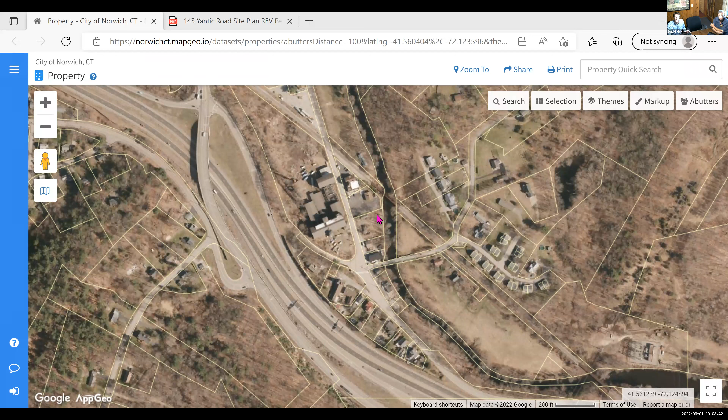I'll start by sharing the GIS aerial photo of the area. This is Route 2 here under the cursor, and here is Hale Mill. Right here is Yantic Fire Engine Company. This is the existing parking lot and existing garage, and this is the currently vacant lot where our proposed expanded paved parking and training area will be constructed. You can see that the Yantic River forms the property line on the east side of each of these lots.

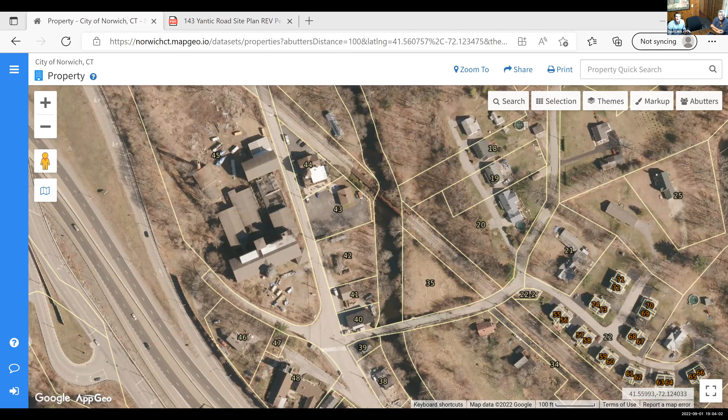Now David, I'm not getting those. If I could just stop you, they're not showing up on the screen. Still not. GIS? Okay, uh-oh. There you go, okay. So did you miss all the photos? Yeah, oh geez, I'm sorry about that.

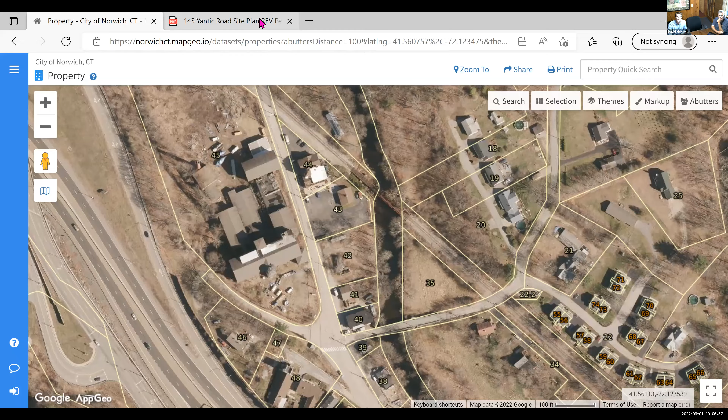All right, so that's our photos. Again, I apologize for that issue there. I'll go back and now you should be seeing our existing condition survey.

Right, so now we'll go to the proposed site plan. There are two parts to this project. One is the construction of a new paved area where the existing gravel surface is, outlined here, taking up most of the property.

This approximately 3,300 square foot area is going to be pervious pavement, which allows stormwater runoff to freely flow through the surface. Below that is a thick layer of different gradations of crushed stone that hold onto that water and allow it to infiltrate. We're using this to reduce runoff from the site and capture the first inch of runoff from all existing and proposed impervious areas that used to flow out to the paved leak off here, which is being eliminated.

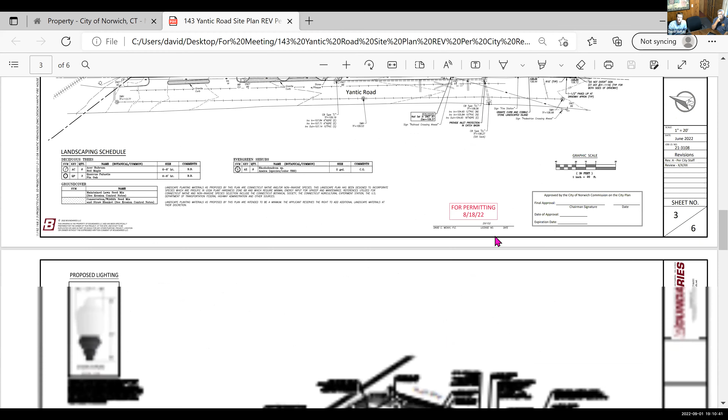This is just the utilities and drainage plan. You can see there is an existing town or city drainage discharge that runs through the property out to the river.

We are proposing to have a high level connection to that drainage pipe, just to protect the surface of the pavement during winter months so it doesn't get subjected to a freeze-thaw cycle from that pervious paved area.

Install a manhole in the parking area where there's been a drainage repair recently, and then connect those under drain pipes to that. Those under drains would only collect the high level of runoff exceeding the 1-inch water quality volume, so it would all be treated water entering this manhole from the parking area, proposed, existing, and the garage here.

Also some proposed lighting along both sides here, and proposed utility service connections for the new garage.

This is the erosion sediment control notes and other standard details. Right here is our proposed E&S measure, a straw wattle. The reason we're proposing this is it's light and easy to install.

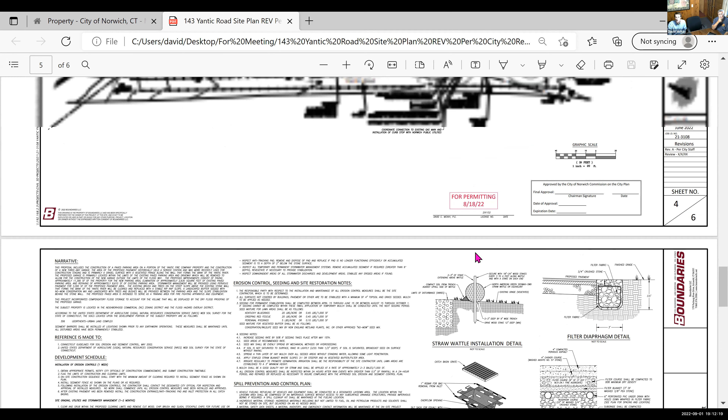Let me go back to the correct sheet. That'll be able to be placed along the entire perimeter of our proposed disturbance before any clearing needs to happen, or grubbing or anything along those lines. It comes in rolls and will be staked in right behind that stone retaining wall, and then up along our limit of disturbance for the regrading and elimination of the pavement behind the proposed buildings.

One other item to note about this property is the entire property is located in a FEMA designated floodplain, and this line here is the limit of the FEMA designated floodway. So as part of this project, the proposed garage will be dry flood proofed.

We are grading the new parking area and behind the building here to provide compensatory storage for the volume displaced by the new building. So all of this area will be lowered from the existing grades to make up that compensatory storage.

And then you can see here, the limit of the floodway. The work shown in the floodway is the slope stabilization, the landscape plantings, and a short strip of the pervious pavement along the edge here, and that stone filter strip.

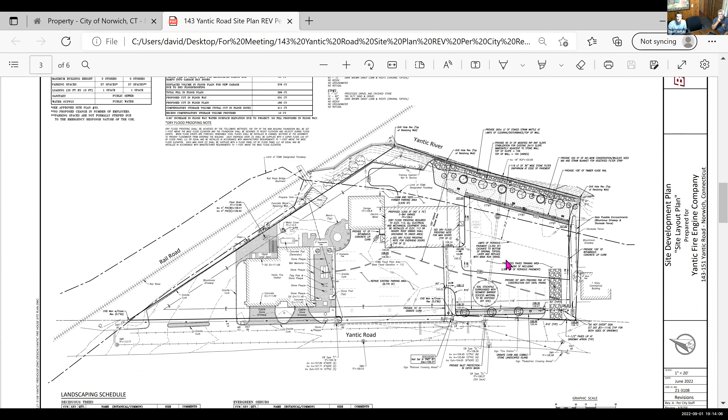Detail for the straw wattle that I discussed, that'll be installed at the perimeter of the project area. Catch basin inlet protection for the catch basin right in front of the property, and a detail for that filter diaphragm along the edge of the pavement.

That's a stone filter for any excessive runoff that ends up flowing over the pervious pavement in extreme storm events. And then the detail for the pervious pavement cross section with the pervious pavement layers, pea stone and sand filters, and then the main storage area for that volume of runoff.

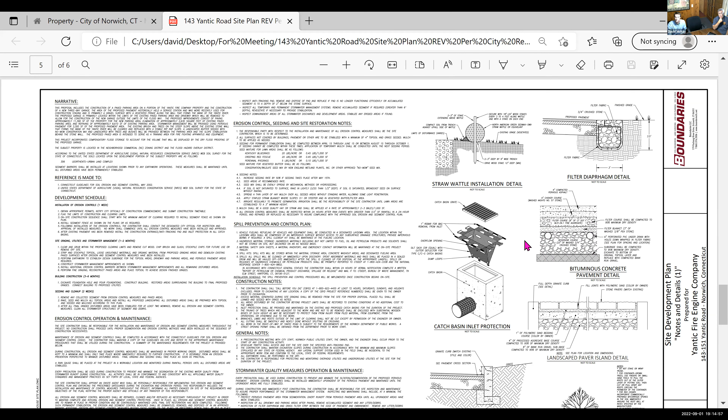There's also proposed to be a landscape paver island consistent with the existing granite and pavement islands that are on the property, and granite curbing, detail for our tree planting, and then the curb along the parking area and the parking cross section.

And an anti-tracking pad detail for the location that construction equipment would exit from the parking area during construction. And just final detail sheet for the riprap slope stabilization immediately behind the stone retaining wall.

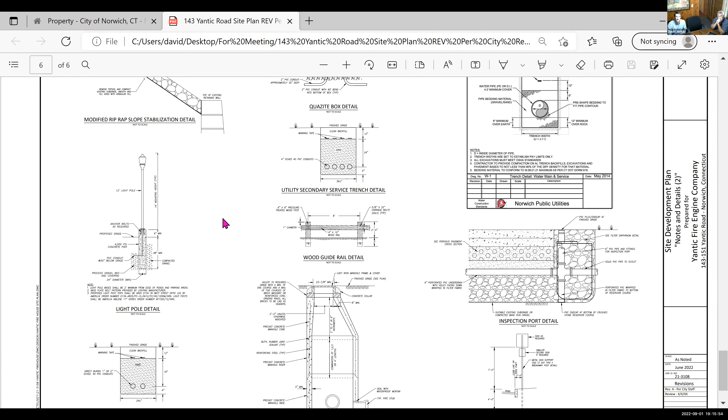Detail for the proposed lighting, which matches the lighting that was installed on the bridge just down the street as well, keeping in kind with the neighborhood.

Detail for the electrical conduits for the lighting, conduit for the service trench, and the handholes for the lighting. A detail for guide rail right along the edge of that proposed training and parking area, our drainage manhole.

The under drain system that I mentioned at the top of that stone storage course underneath the pervious pavement, and detail for the water service and some directional signage.

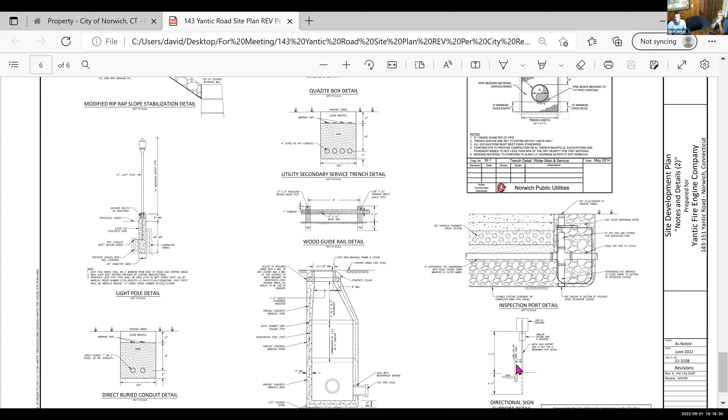Our total area of activity on this project, about a half acre of this is in the upland review area of the Yantic River. You can see the upland review area line here does encompass most of the property.

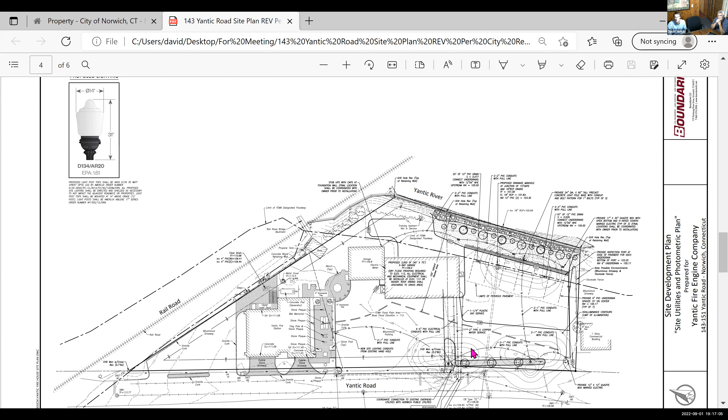I think that that brings me to the end of the plan set and the presentation. Happy to answer any questions.

Dave, you want to go over again what happens in a major storm when you have more than an inch of rain?

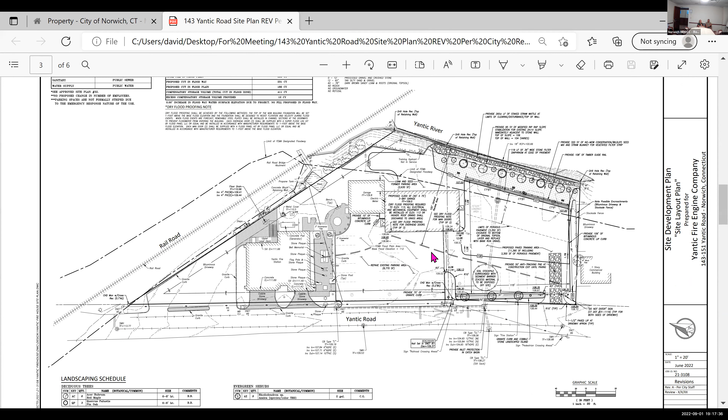Yeah, I'm scrolling down to the cross section here that shows the under drainage system. So this layer of crushed stone here below that piping is sized to hold more than that first inch of runoff. That's intended to provide the peak flow rate attenuation.

So we did prepare and submit a stormwater management report that was reviewed by Brian Long, the city engineer, demonstrating that with the infiltration of this stone course and the control provided by this 6-inch outlet pipe, peak flow rates will not exceed existing conditions peak flow rates as a result of the project.

These upper layers of pavement, stone and sand help filter the runoff as it comes into the pervious pavement cross section. Then that runoff would get down into this lower layer of stone here and begin infiltrating into the existing soils below it.

And in those extreme events, we would get to a condition where runoff would pond to a point where it can flow into this perforated pipe at the top of that stone reservoir course. Then that would flow out through the pipe, connect to the drainage manhole, and drain out to the river.

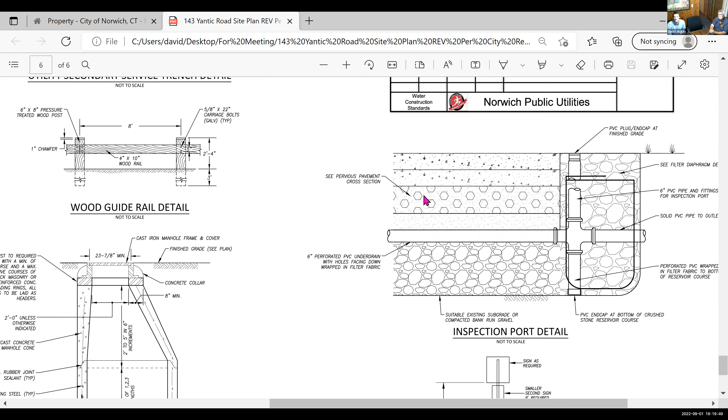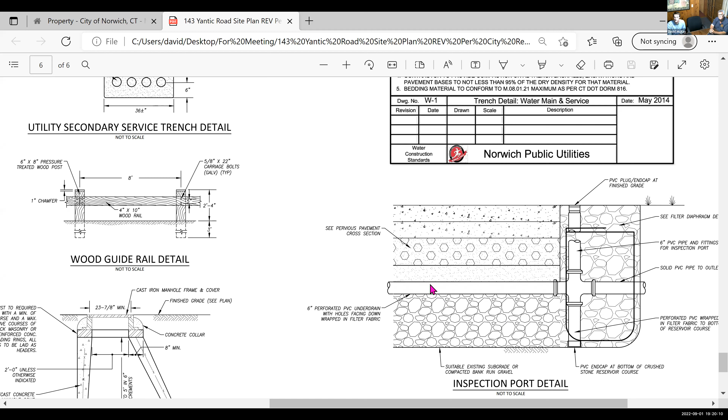Also being in the 100-year floodplain as well. So that runoff would then flow like across a normal paved area into our stone filter course at the edge of the pavement, receive some treatment there, just filtration of that last bit of runoff that can't make it into the pervious section, and then flow out through the vegetated buffer.

And scroll back up to that sheet. So in those extreme situations, we would have the stone filter course here, and then the vegetated buffer between the parking area and the river.

And we're specifying a no mow or infrequent mowing seed mix for this area to reduce maintenance. And so that also helps with the runoff going through, because that's not going to be a typical maintained lawn area. It may get mowed once or twice a year, but it would be more of a denser vegetated area between there and the river.

Thank you. You're welcome. Any other questions or comments?

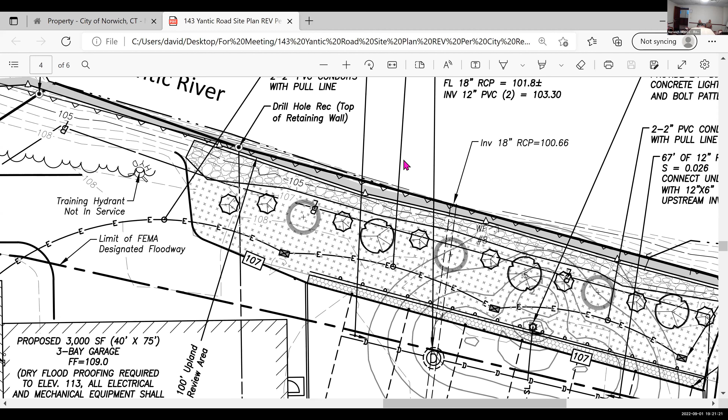The only comment I'd like to say, this is Brandon Hyde. Familiar with the site, I think that the old school splashway that's there, that's paved, does nothing for filtering. I think this is a great site improvement to the site overall. So I just want to applaud the efforts, and I think it's, like I said, an overall site improvement. Thank you.

Anyone else? Okay, we have to determine whether or not this is a significant activity.

Do I hear a motion? This is Brandon, I move that it is not a significant activity due to the overall site improvements. This is Doug, second. There's a motion on the table. All in favor, please state your name and say aye. Doug, aye. Brandon, aye. Pete, aye. Michael, aye. All in favor, motion is approved.

Which brings us to, let's see, IWWCC 2209, 3 Sabrina's Court has been withdrawn. So we have new business.

Oh, Joe Cole- No, hold on. Sorry, I skipped ahead. Yep, I have a couple things. I'd like to go over my memo real quick, which I need to bring up here. If you give me a moment, please.

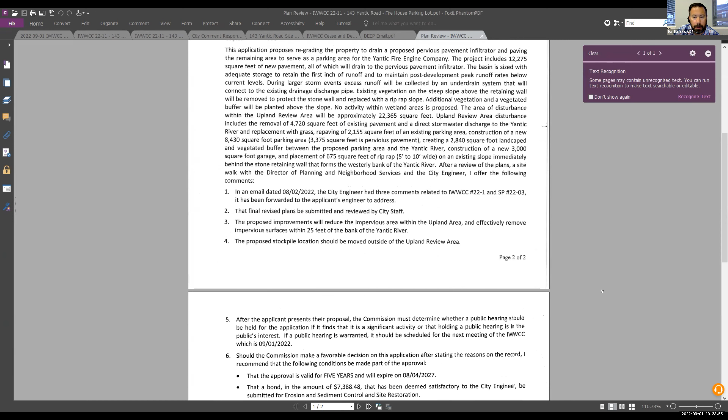So we had just a few comments, and the city engineer had a few comments, and Dave provided updated plans, which he just went through, that addressed all of them. My main comment was asking that they move the stockpile location outside of the upland area, which they did on his plan. The city engineer determined that a bond for E&S in the amount of $7,388.48 is satisfactory.

I have a number of conditions that, should you choose to approve the project, I'd ask to be made part of the approval. I'd also ask that we waive the reading of them, mainly for Rich's sake. They're on the screen now. I'll send them to the clerk to be included as part of the minutes. That's all I have to add. Thank you.

A motion to waive the reading of the 12 items on Dan's list. This is Doug, so moved. Brandon, second. All in favor, state your name and say aye, please. Doug, aye. Michael, aye. Pete, aye. Brandon, aye. So moved.

Okay, now, is there a move to approve IWWCC 22-11? Brandon, I move to approve IWWCC, what was the number again? 22-dash-2-11. 22-11, for the record, 22-11. This is Doug, second. Doug's got it. There's a motion on the table.

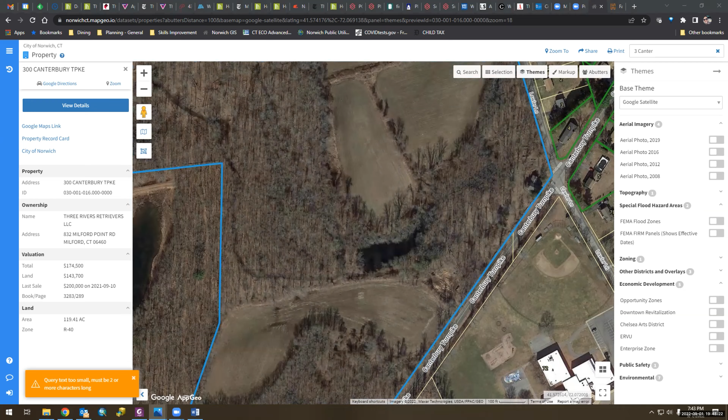I understand. Is there currently machinery buried in the mud on that site or no? Is there currently any machinery on the site? No, there's no machines at all there.

Was there any larger trees taken, or was it mostly scrub brush around there? Nothing, everything that came down was smaller than those trees there. Scrub brush, I think it was Russian olive, and a lot of heavy vines really that engulf the trees. Masses of vines, see the bittersweet. And Brandon, having been out to the site in 2021, when the wall was being removed, there was extensive viney, brushy growth, and you could see it in the aerial. It was very, very overgrown.

Dan, since you were out there, I'll ask - I haven't been out there this summer because we don't have permission to go on the property unless there's an application. So Brian Goboleski from DEEP went out and took pictures as part of a water diversion investigation, and they determined that it was not significant for DEEP to get involved, and told me to bring it back to the commission here. So when you were out in 2021, Dan, was what you saw for vegetation invasive?

I mean, I heard Russian olive and bittersweet. Was that? Yeah, it was everywhere. Okay. It was not anything you would have by choice. Okay.

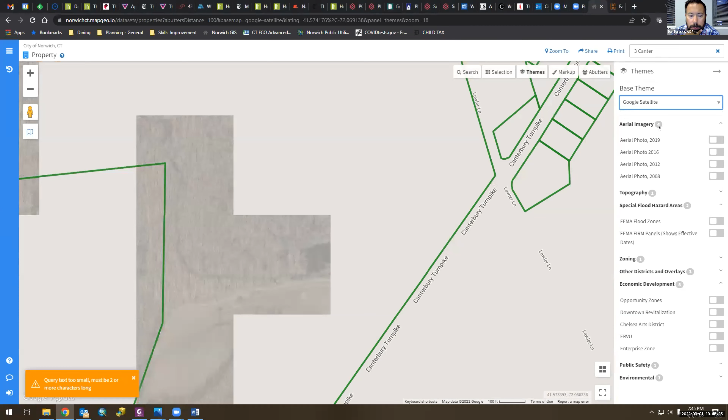So this is the most current Google satellite image. And then 2019. 2016. 2012. And 2008. So it's relatively been that size for quite a while.

And then I do have, if you give me another moment. Dan, this is Pete. You said that it appeared as though that did increase in size, the pond, correct? Yes. Okay, all right. Well, could you say that last statement?

I have a video. One of the board committee members wanted to confirm that Dan from the city believes that it was larger. Can people see the video? Yes. Yeah.

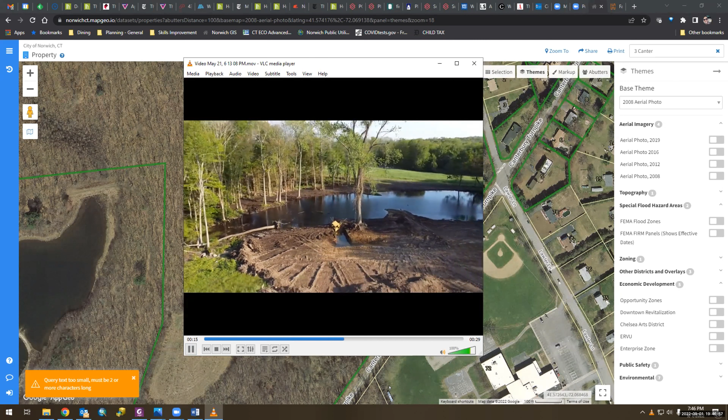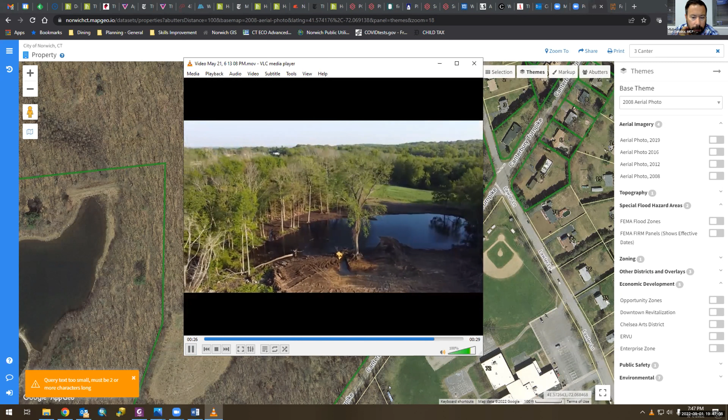So I don't believe it's a substantial increase in the size of the pond, but you can see the cleared area and that dozer is stuck there at that point. And that is from May of this year. We actually had moisture - it's a puddle now. Granted, it hasn't really rained since then.

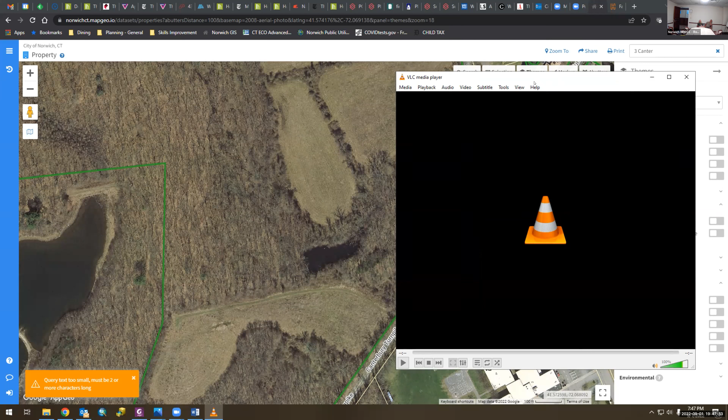So Dan, in the city's professional opinion, we're heading into prime restoration season here in the fall. At this point, the damage has been done, although it seems it was mostly invasive species that have been cleared. Is that your assessment as well?

Yes. So the most important thing we can do to protect this resource here as a commission is to take advantage of this season we're heading into to come up with a plan to get this area restored, seeded, stabilized, and maybe some desirable natives planted. Is that your assessment? I would agree with that. It's ultimately the commission's decision, but yes. That's how I see it as well.

And I'll just say that your purview is related to this. It has nothing to do with the dogs and whatnot. The complaint that we received is bigger than that. But in terms of the wetlands issue, this is the main issue here.

What's the city's opinion on usage for agriculture? If they want to use it for agriculture and they make the case for that and the Wetlands Commission is fine with that, then they have that right. You need to determine that first. So any bigger changes need to be brought because there's extensive wetlands on the entire parcel.

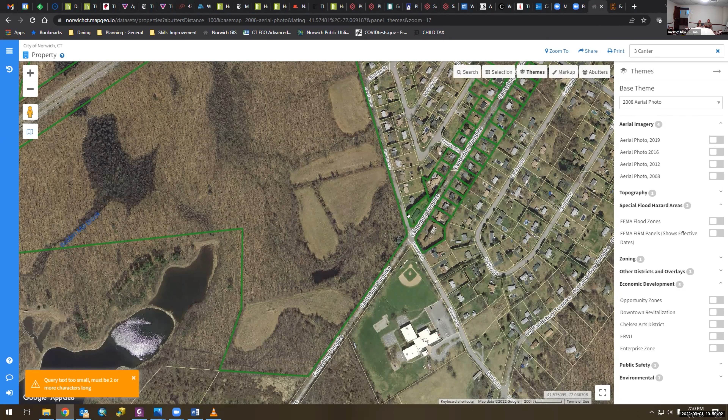I think it's all one lot. It is all still one lot. Yes, how many acres? 119. Oh, it is the entire lot then. It's the whole, yes, it's large. Okay, I remember approving that.

Yeah, most of us that are sitting here tonight are part of that. They did do the whole parcel here. Yeah, they did do a select cut years ago. I remember that.

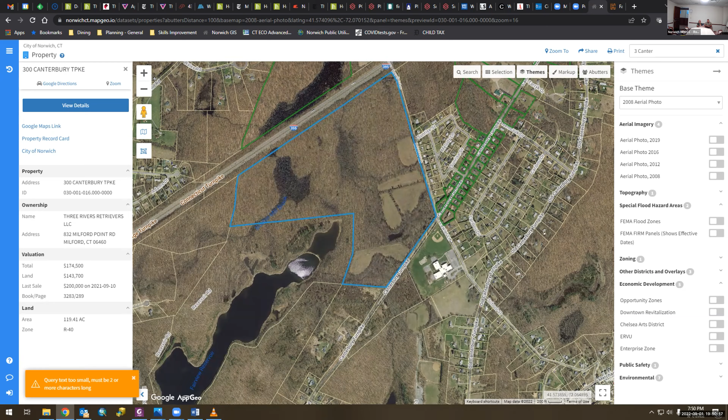So when I spoke to Mr. Enos in 2021, they were removing the walls here to combine these fields. And the plan, he gave me a typed out plan where they may expand here in the future, and longer term there may be, I believe, 3 homes developed.

The whole plan was for personal enjoyment of the property, there was no commercial enterprise. Am I correct in that? You are correct. I want to add to the rock wall deal—the rock walls were removed so we can train the dogs across one continuous field and not have rock walls. Correct, and we were fine with that.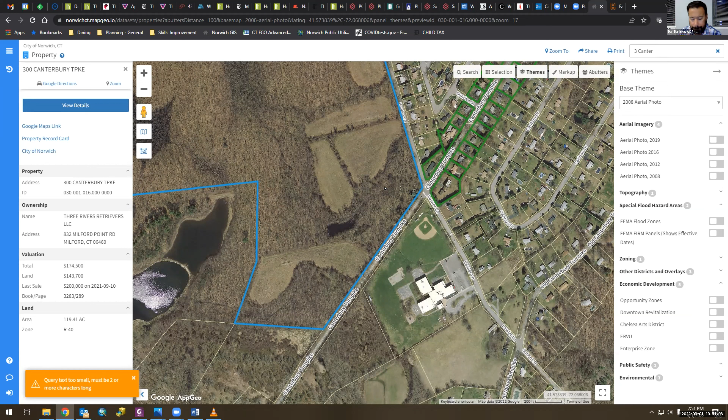What's currently in these fields? Right now it's rye and clover. The radishes were there, but they just deteriorate from the deer. Sure, that was a cover crop, the radishes. Yep, and right now there's rye and clover.

And is that going to be harvested at all for hay or not? Not at this moment—we've just been mowing it for our training to run the dogs through different various covers of training. So right now, no. But maybe in the future we may let somebody bale it, or put a better hay in there that could be baled. So down the road possibly, but right at the moment, no.

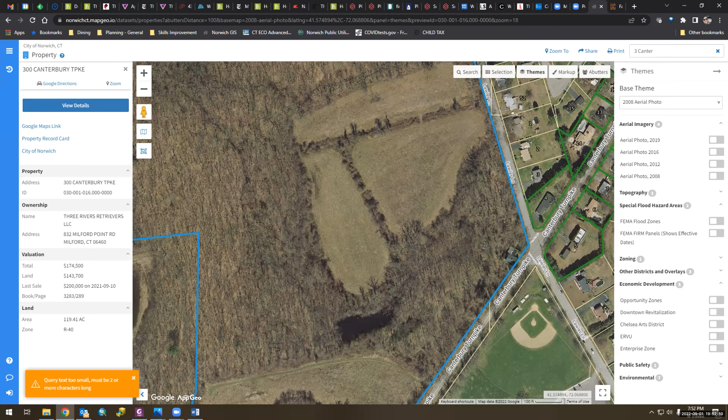And this is Pete. When DEP was out there, did they notice any sedimentation downstream from that? It looks like there's a water course leading from that body of water. Was it investigated if there was any evidence of sedimentation downstream? There's a substantial amount of area directly around the water that's all been excavated, so that probably wouldn't have been so bad if it weren't around the water, but Pete, I don't know if it goes anywhere.

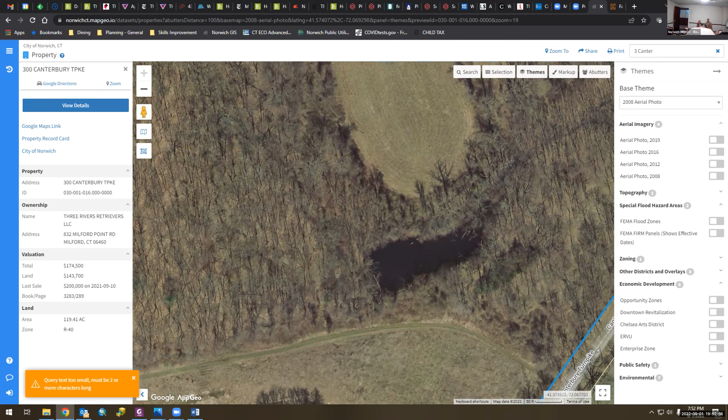It does. The only way for that water to overrun is whoever built that pond put a dike in on one side, and it's a big dike. The only way for that water to overflow and run down through them woods is if it ran, seeped underground—very possible—and if it overflowed the dike. That's the only way for that water to go down. There's no pipe, there's nothing. The dike is still there, yes, in good shape, it's all there.

So I have the email, it's on the screen here, and this was DEP's response. Is it okay if I come up and read that? Sure. It's activity that has taken place in a 100-foot upland review area, which requires that any plans or activities in that upland review area need to be permitted and reviewed by the Inland Wetlands Commission. Correct.

This is Brandon. Because I consider this to be time sensitive in terms of taking advantage of this season, personally I think we need to think of this from a practical standpoint. I would say that an application should be submitted, but I also would say that I would trust Dan to help manage this, to at least get it stabilized for this fall until a more extensive plan can be submitted, because I think that's the most important thing at this point. But I would say we need to give a timeline of no more than 2 weeks to get that primary plan of stabilization submitted.